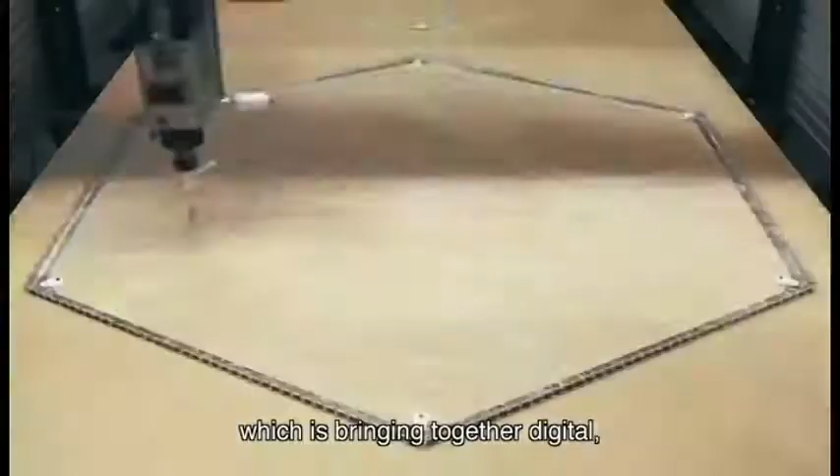Computers and communications technology. We're now in the early stages of the fourth industrial revolution, which is bringing together digital, physical, and biological systems.

One of the features of this fourth industrial revolution is that it doesn't change what we are doing, but it changes us.

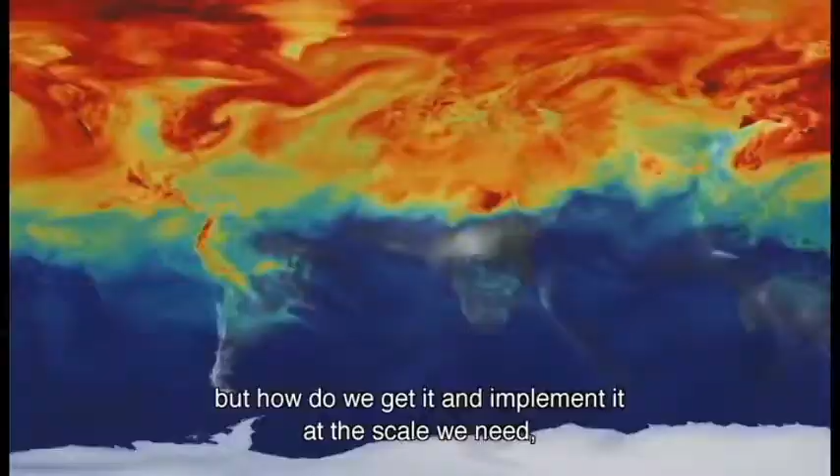We need a different economic model that will allow us to meet the basic needs of every human on the planet, and that will be focused not on growth per se, but on maximizing human well-being. We have energy technologies that can power our civilization, but how do we get it and implement it at the scale we need at a price that people around the world can afford?

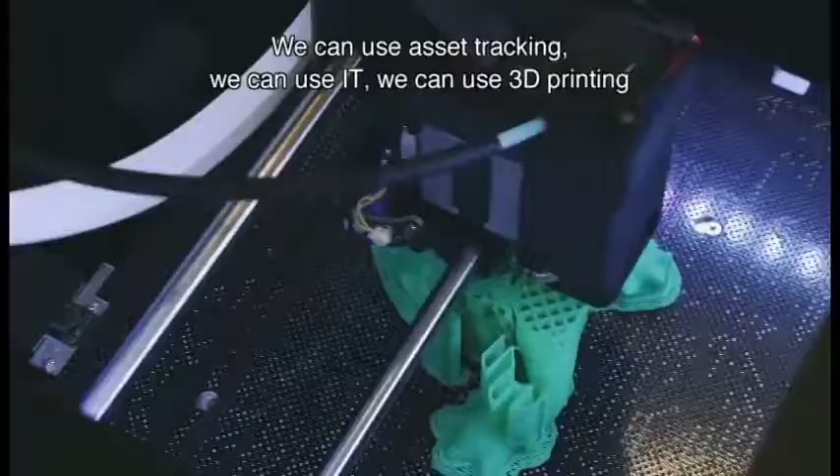If we're able to do something to transform cities, to make them more efficient, then the impact can be huge. We can use asset tracking, we can use IT, we can use 3D printing to decouple growth from the resource constraints we have. The question of adding quality to quantity, it's really about a diverse, safe, healthy, and just world. It's this ability of digital technology to change outcomes, to truly empower people that can create a more...

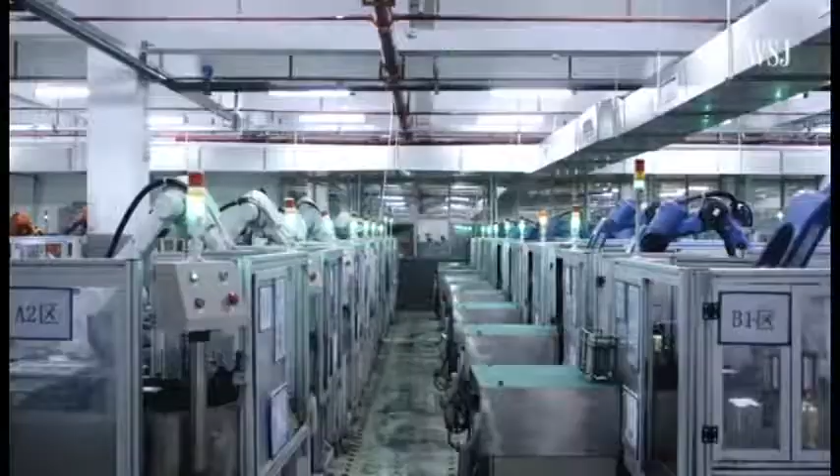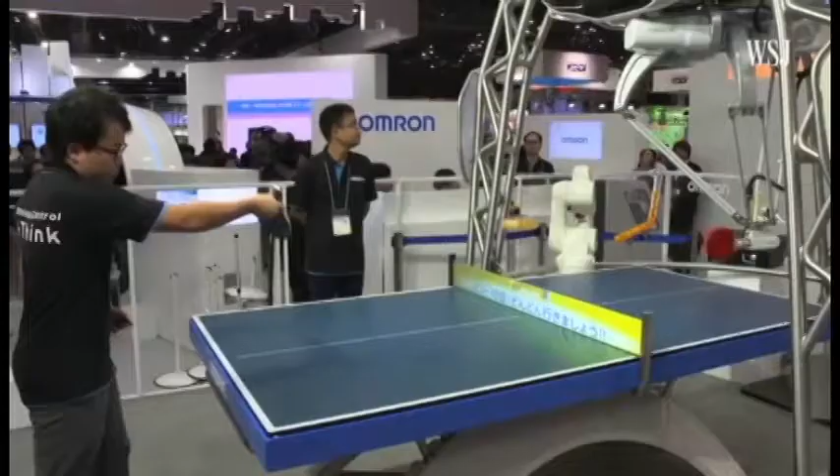Some economists say the world is entering a second machine age. Artificial intelligence and other advancements enabling robots to do tasks that until now only human eyes, minds, and hands could handle.

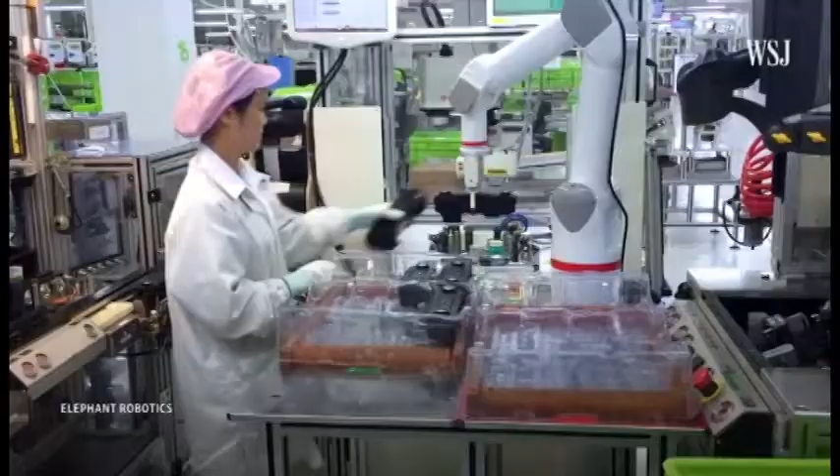The head of the robotics division at Yaskawa, Masahiro Ogawa, seems most excited to talk about robots that don't need to be walled off from humans, that work alongside employees. In the industry, they're called cobots.

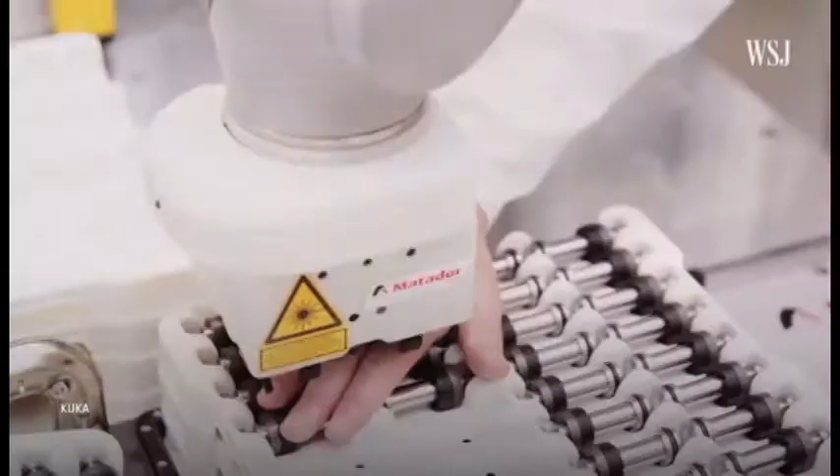The International Federation of Robotics predicts that in coming years, cobots will lead the robotics industry. That's partially driving startups like China-based Elephant Robotics to get in the game.

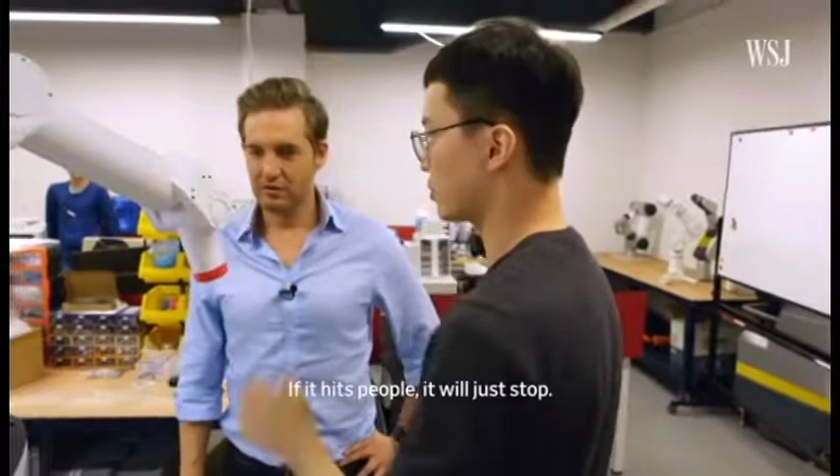If it hits people, it will just stop. Yeah, so it works with people. Yeah.

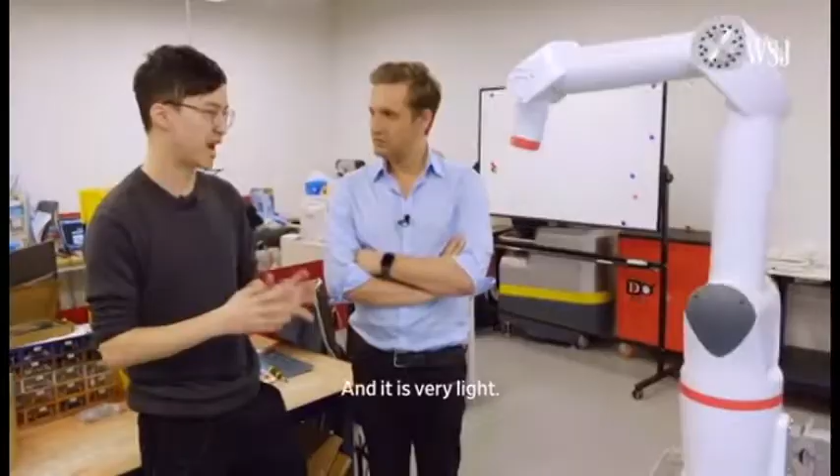We asked their founder, Ju-Yi Song, how his cobot is different from traditional robot arms. It moves not that quick, and it is very, very light, so it can work with people. This is the most important thing.

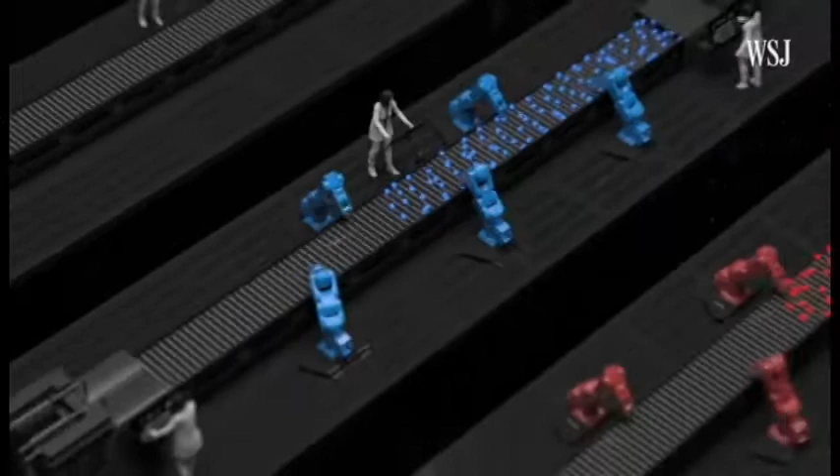In addition to being safer, the collaboration proves to be more productive. A study conducted by MIT researchers found that human-machine groups were more efficient than teams wholly comprised of one or the other. They also reduced human idle time by 85%.

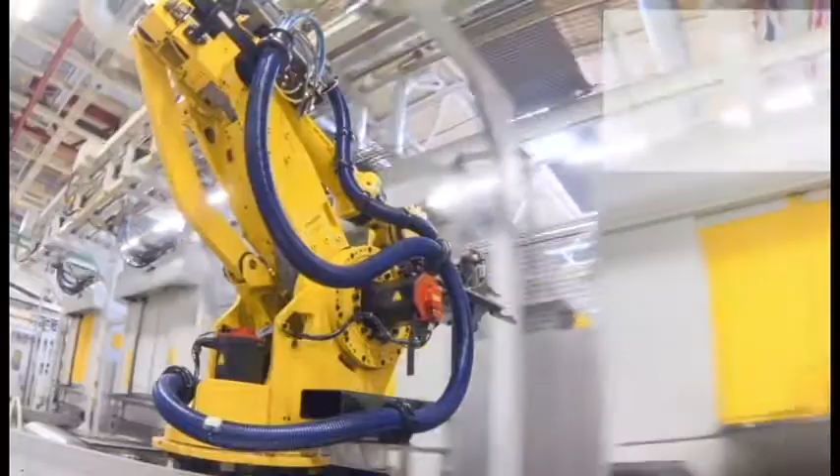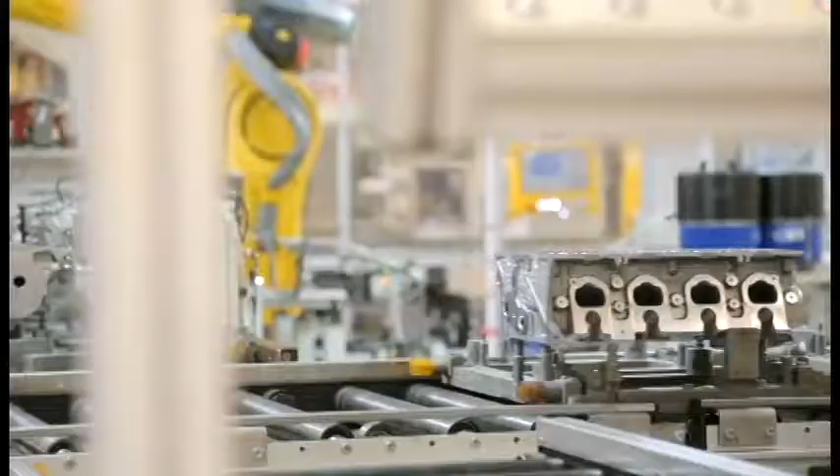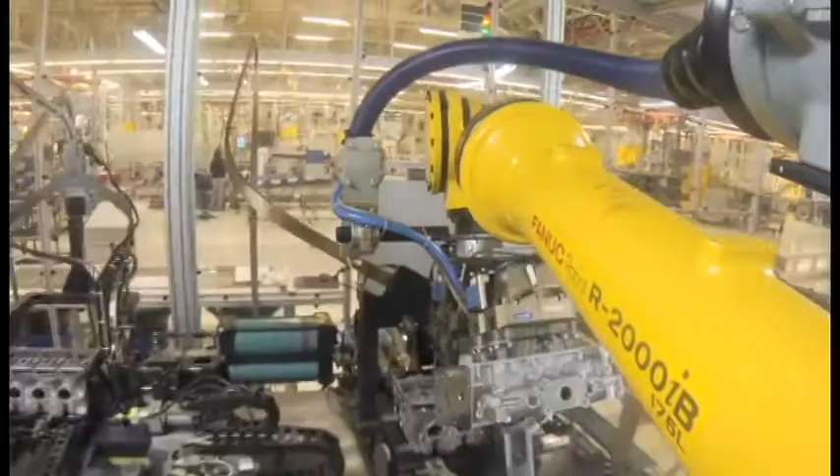FANUC robots and factory automation solutions have been facilitating industrial production for over 60 years. FANUC is present in 120 countries, including Hungary, assisting key sectors like the automotive industry, for example at the Audi Hungaria Motor Limited factory in Győr, where they are developing and manufacturing cars for the Audi AG and the Volkswagen Group.

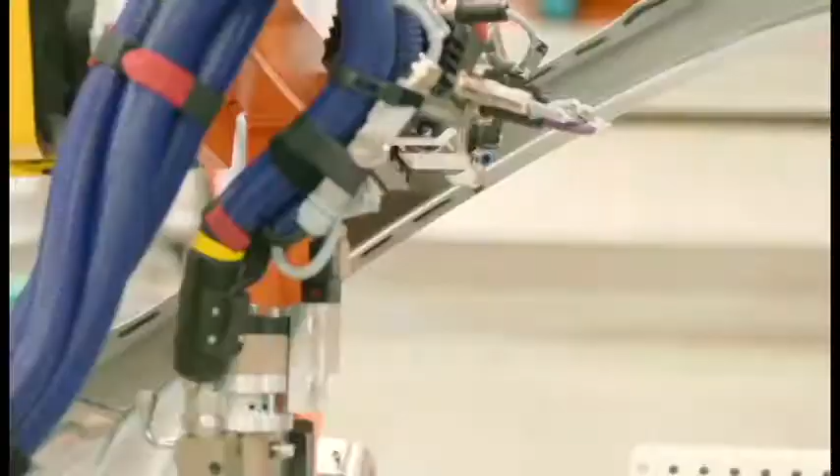Audi Hungaria is one of the companies with the largest turnover and export in Hungary, producing 2 million engines and 135,000 cars in 2014.

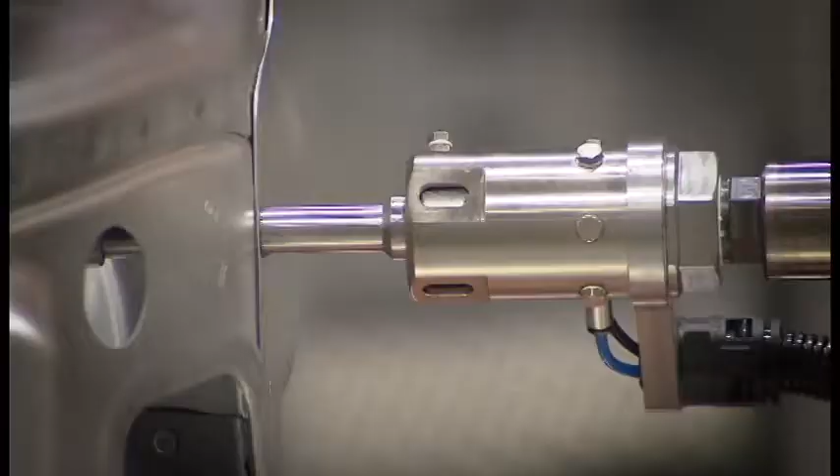In our experience, FANUC robots work reliably at our factory. We are constantly improving our production and install robots to reach our targets. In environments where we need to work with high pressure or temperature, the robots are up to the task and deliver quality standards, which would not be possible with human machining.

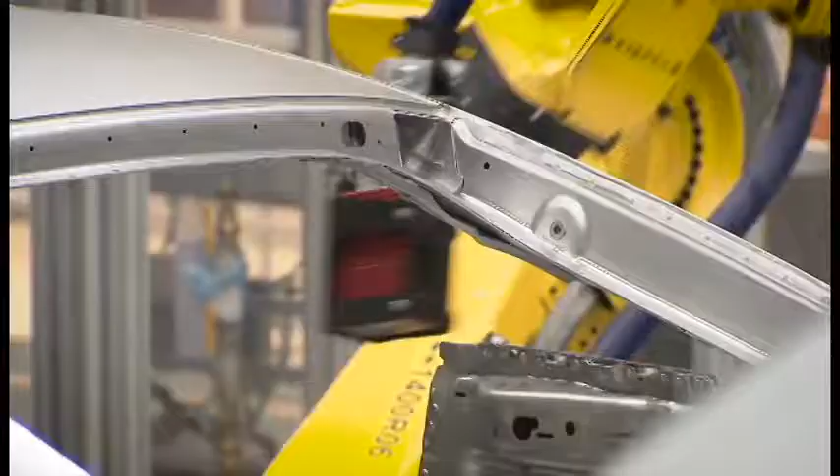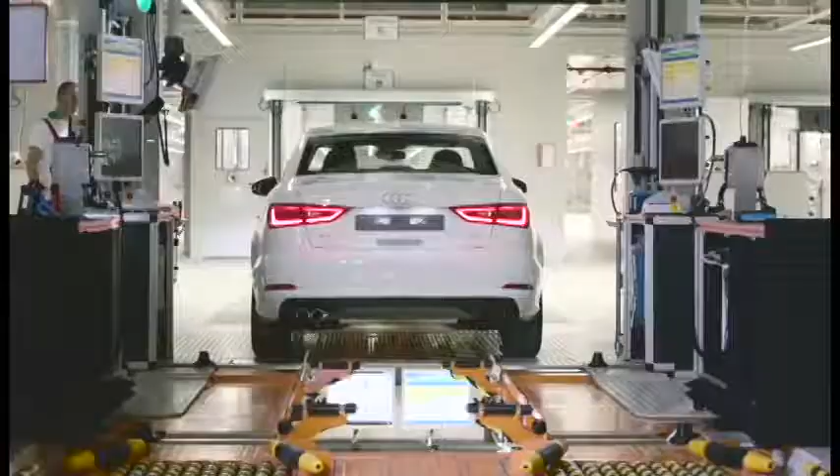Essentially, robots are used for applications too difficult for humans or where rapid machining is required. Our colleagues like working together with robots as they make human work easier by delivering these tasks. It's very important to program these robots correctly, because when problems arise, it's usually not the robot that causes them, but improper programming or the lack of maintenance.

Regarding this, I'd like to highlight that FANUC robots are easy to program, dependable, and we have a very good experience with them.

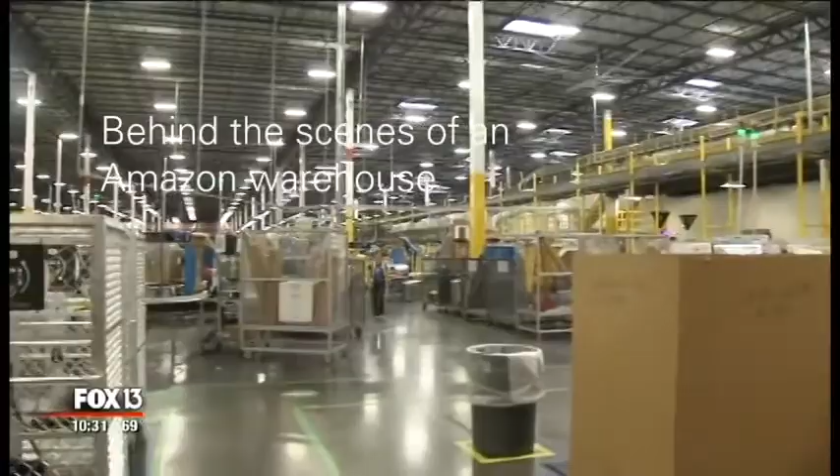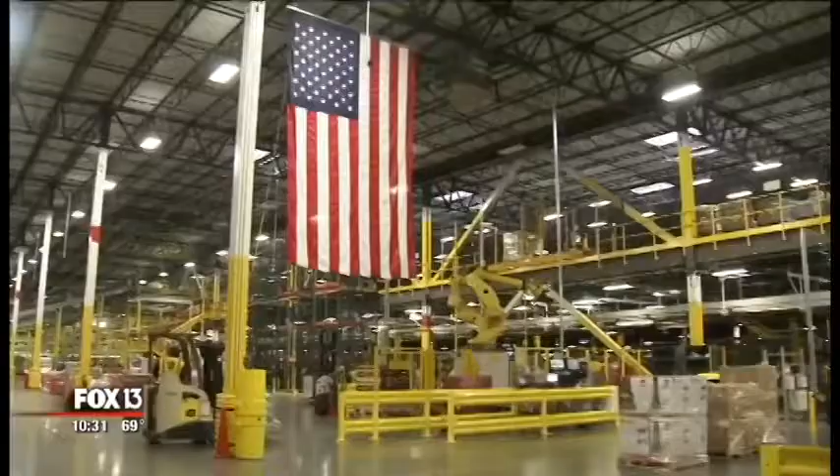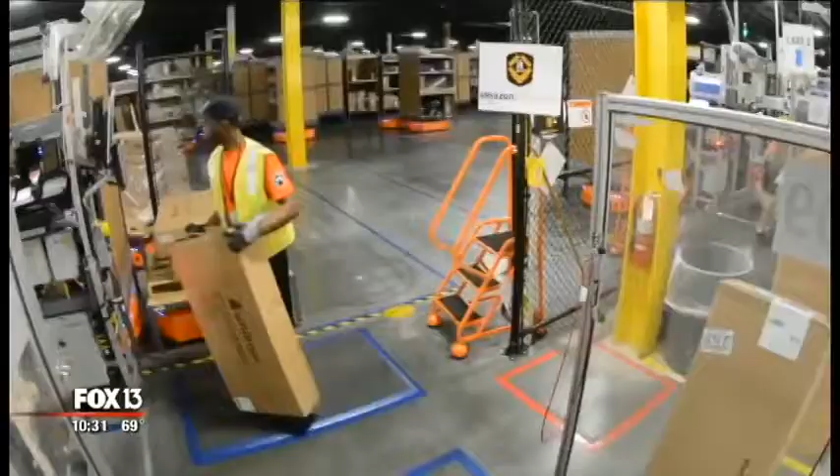One 6-ton pallet slinging robot — we affectionately call it Robo-Stow — and a squad of box-shuffling cyborgs. We like to think of it as a symphony between robots and our great associates.

We found a secret at our feet: the floor is covered in tiny QR codes. It's sort of like a chessboard. Eyes in the robots' bellies read the codes and broadcast their position — choreography that keeps your shipment on time and avoids collisions. They know exactly where to go.

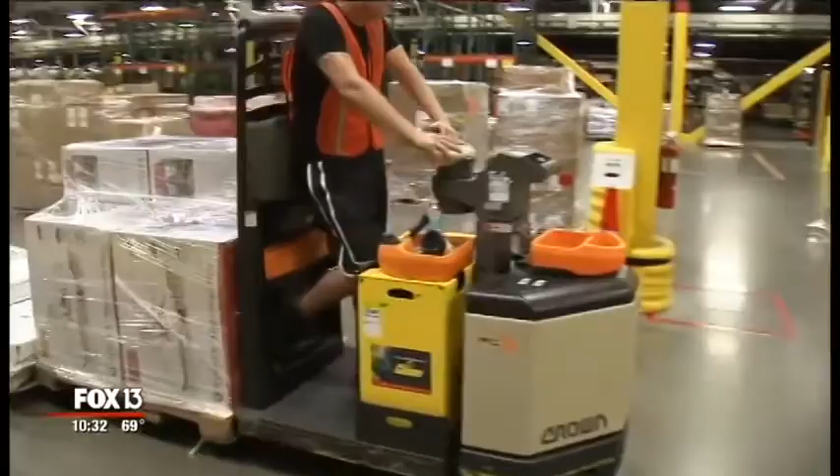Clicking that yellow button sets these robots in motion, sometimes within seconds. But your order is not handled by Android alone. The drive units, the Amazon robots, are actually bringing items from where...

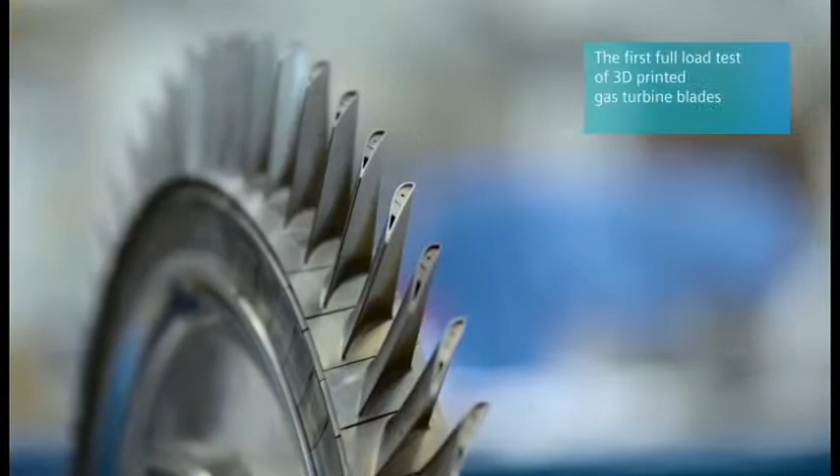The additive manufacturing process enables us to manufacture parts that we cannot manufacture today with normal, traditional manufacturing processes. That enables us to be more ingenious in terms of how we design our turbine blades, how we cool them and how we light them.

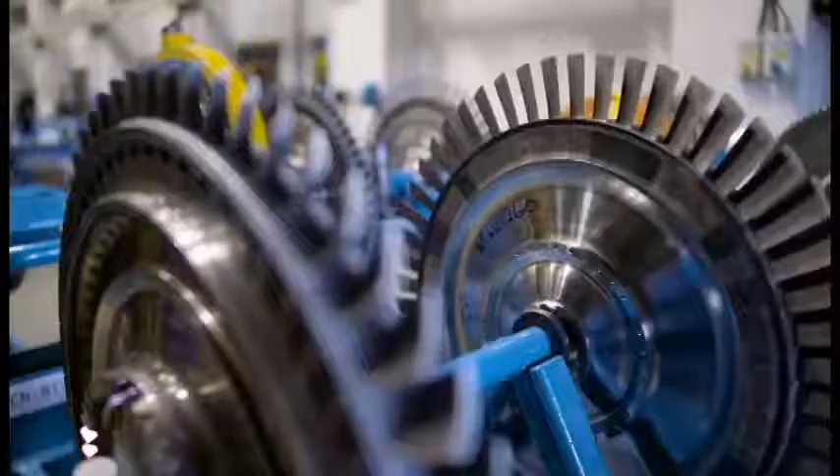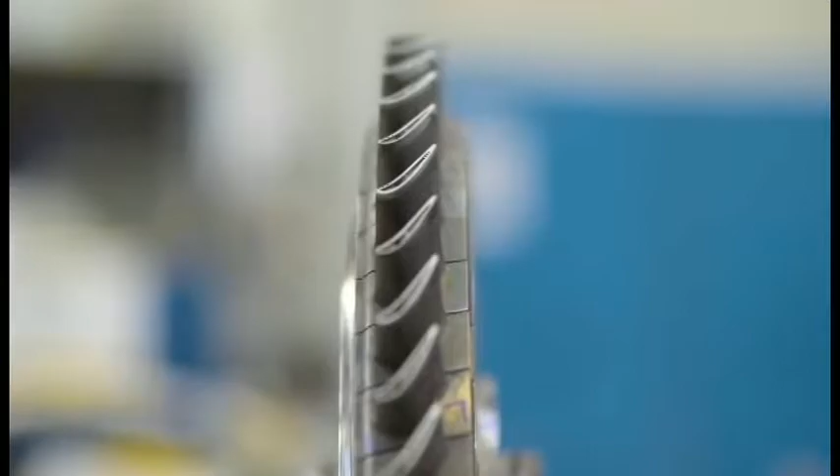Turbine blades has always been, I feel like, a vision. It's a real target. It's the most challenging area of the turbine. So if you can print a turbine blade, you can pretty much print anything. And we've proven over the last couple of weeks now that we have been able to print a turbine blade and test it in an industrial gas turbine engine.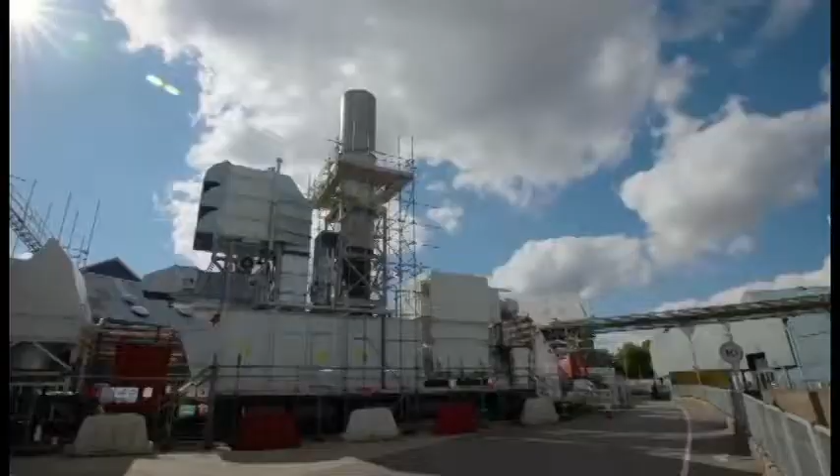In Lincoln, we're testing a 3D printed blade, and we believe this is special because it's the first time anywhere in the world this has been tested at full load conditions in a gas turbine. We test these blades very quickly. In 1 hour, we run the engine at full load. We put a probe in here to measure the material temperatures, which tell us how long these blades will last in a turbine.

Now, the turbine blade itself is this particular blade. This is the high-pressure turbine blade of a 13-megawatt SGT-400. Typically, we have to do all of the design, analysis, the aerodynamics, the work in terms of heat transfer on this blade 2 years before we can actually then understand in an engine how it's actually going to perform.

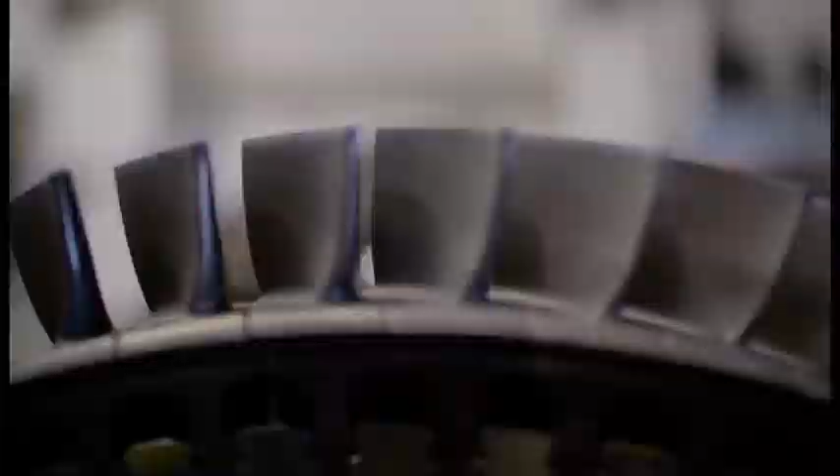What additive manufacture does, and this is the additive manufacture blade that we've actually tested in this engine, this gives us the ability to cut that lead time down from 2 years down to 2 months. It allows us to create new designs, to get more efficient engines, more efficient designs into our turbines, tested, and then onto ultimately our customers.

We will see quicker development times. You don't need this very expensive tooling in order to make your products. So that makes additive manufacturing perfect for design modifications. You'll get them much quicker.

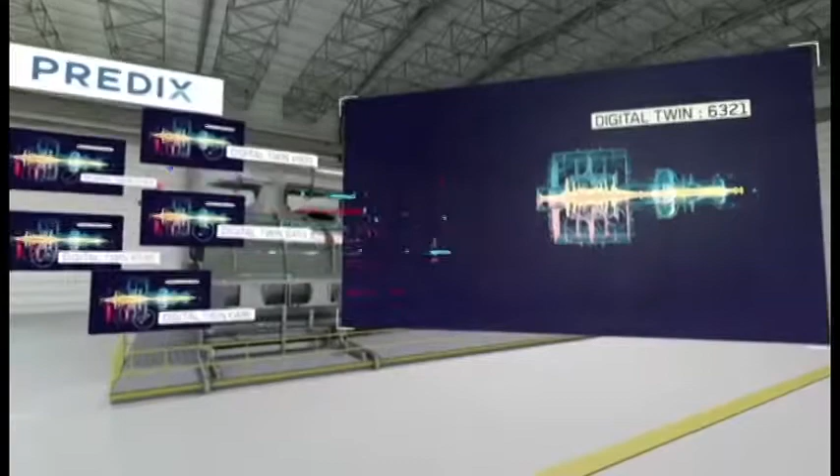Operator, a change in my mission is causing damage to my HP turbine rotor. Okay, Twin, help me understand the problem. What's your operating profile?

In past 6 months, my number of cold starts is 4, my number of warm starts is 8, my number of hot starts is 39, the number of start-stop cycles has increased by 27.5%.

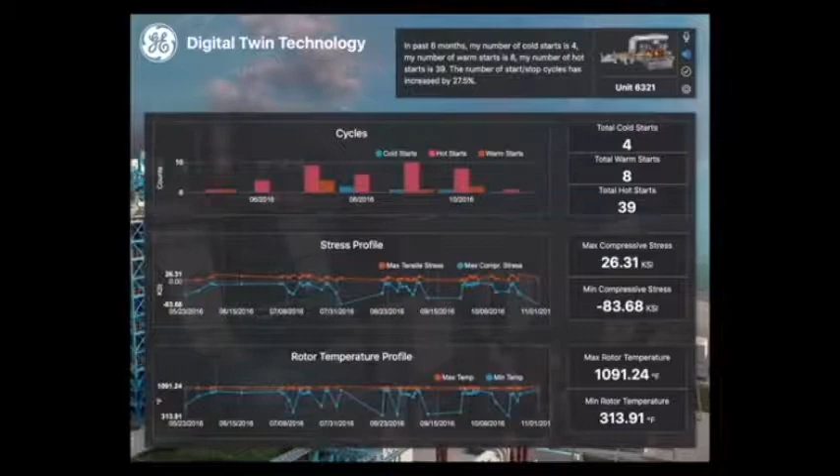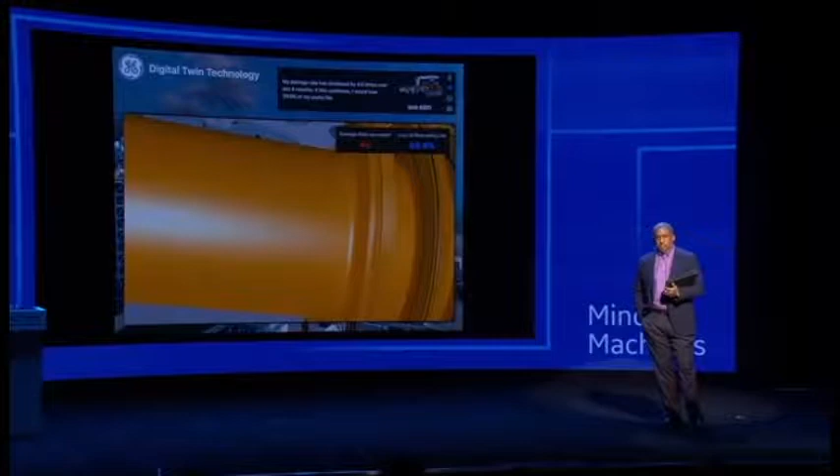Twin, tell me about your rotor damage. My damage rate has increased by 4.0 times over last 6 months. If this continues, I would lose 69.9% of my useful life.

Twin, give me options for mitigating that rotor damage. Based on weather forecasts, historical data, fuel cost, electricity pricing and my present condition, I have 2 options for you to optimize operations. Option 1 is to manually slow down my startup ramp rate so that you can reduce the wear on my rotor. Option 2 is to download the OpFlex app and apply stress controls to minimize wear and reduce fuel consumption too.

Twin, give me the factors you use to calculate option 2. I used my past 15 years of historical data, fleet learning from 125 other D11 steam turbines like me, and 58,965 simulation runs to get this recommendation. I'm 95% confident of my assumptions.

Twin, I need a financial perspective. Tell me about the numbers. The numbers look good. We can reduce stress by 25%, which brings the damage rate back to normal range. Startup fuel cost will go down by 40% and startup time will be cut by 50%. You will also avoid $12 million by preventing an unplanned outage.

Twin, okay. I select option 2. Let's do it. I'm initiating option 2, which is Flex Start. Thank you. This is happening now, today.

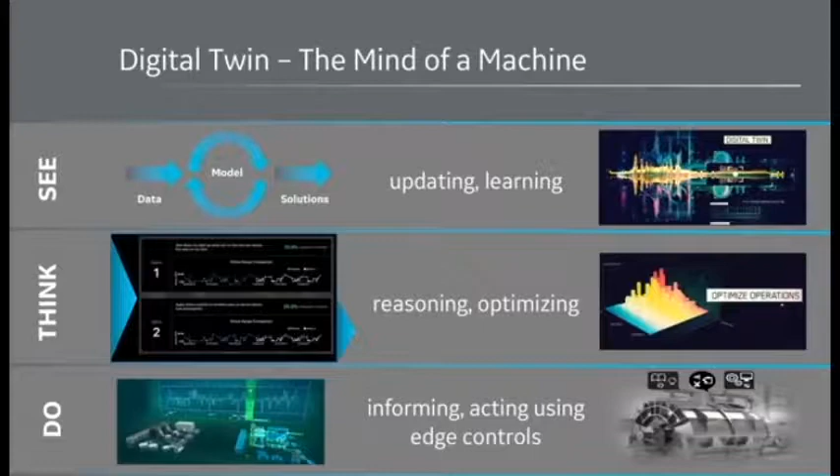This is a representation of a D11 steam turbine that's currently running in Southern California. We call these representations digital twins. What you saw was an example of the human mind working with the mind of our machines. What's a digital twin?

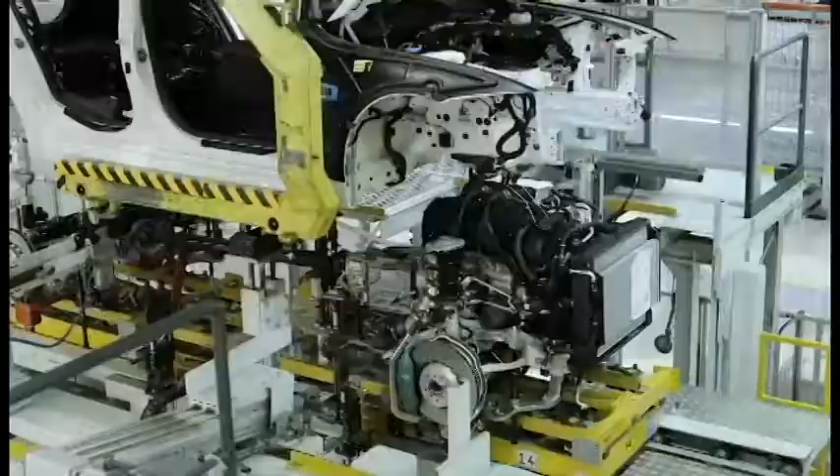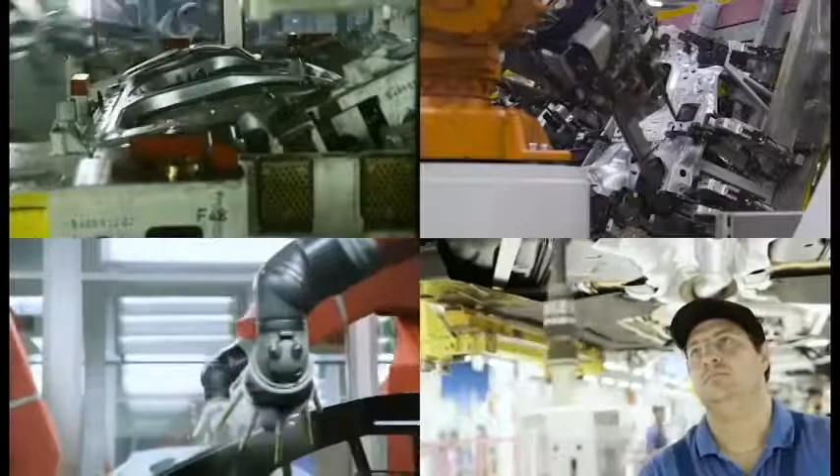Digitalization opens up fascinating new possibilities for the BMW production system. Large quantities of data are generated at many stages in car production. Today, we are already drawing major benefits from intelligent analysis of production data. Our customers benefit from even higher quality. Production uses resources more efficiently, and we are able to manage system maintenance more precisely. Let's take a closer look at the innovative solutions that emerge when our specialists immerse themselves in the virtual world of data.

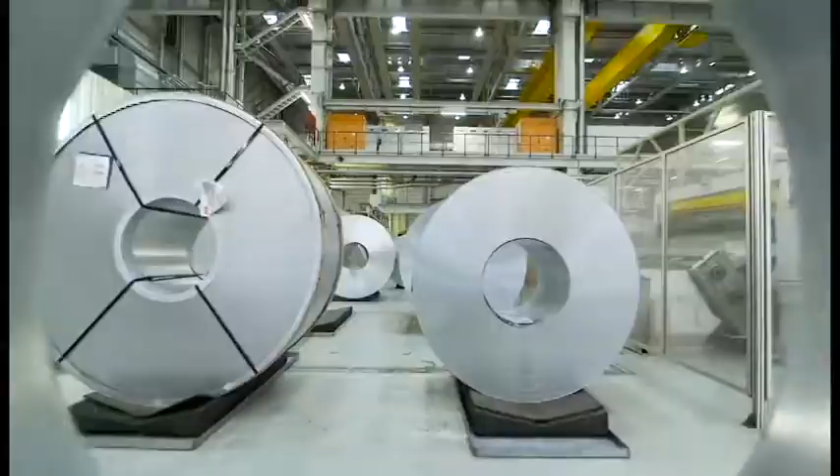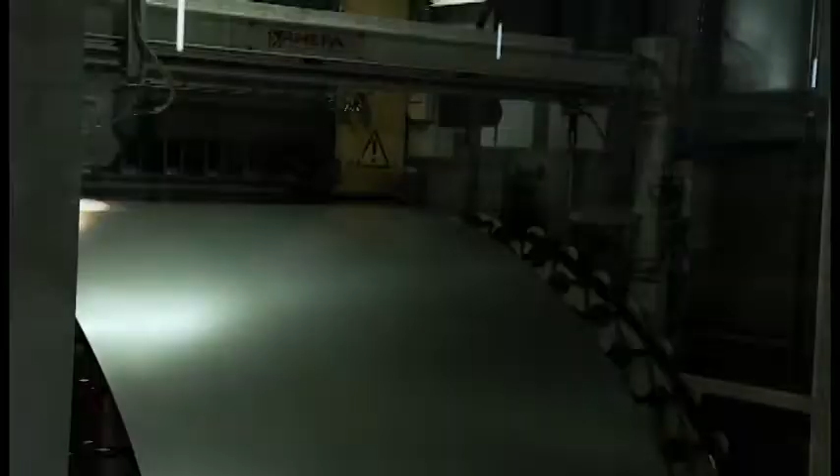Starting with our new BMW X1, several kilometers worth of steel are used to form parts for the body. But on a 3-kilometer roll of steel, there are bound to be deviations. The material is not equally strong or thick in all places. Some areas have been oiled more, some less. So how can the press that forms the flat sheet into body parts be adjusted to the unique individual characteristics of a cut panel?

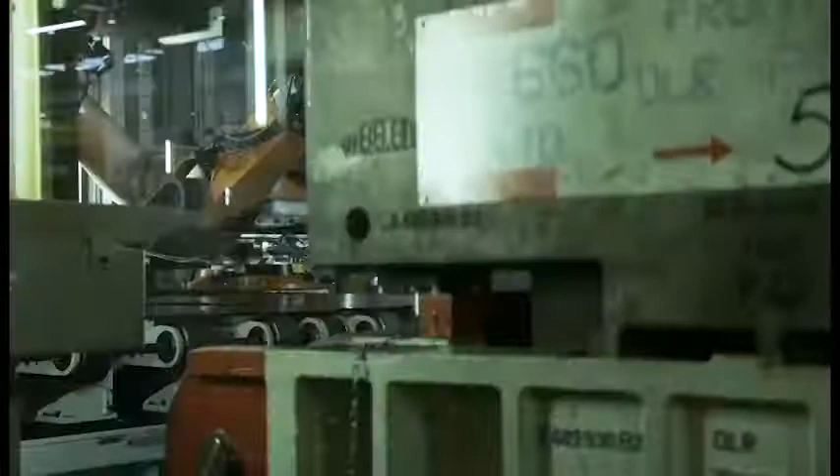Here's the solution. Each tailored piece, also known as a blank, is gauged and given a laser marking with data that can be transmitted into the press.

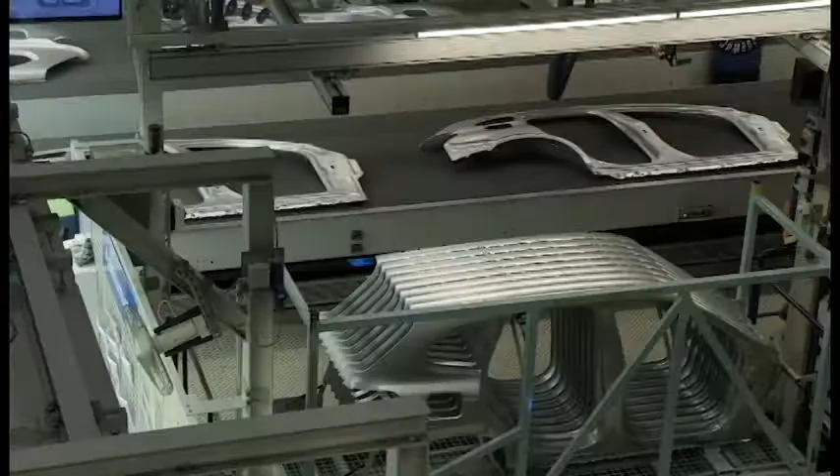The individual parts formed in the press shop proceed to the body shop. Just like in a jigsaw puzzle, these parts are fitted together step by step to create the body.

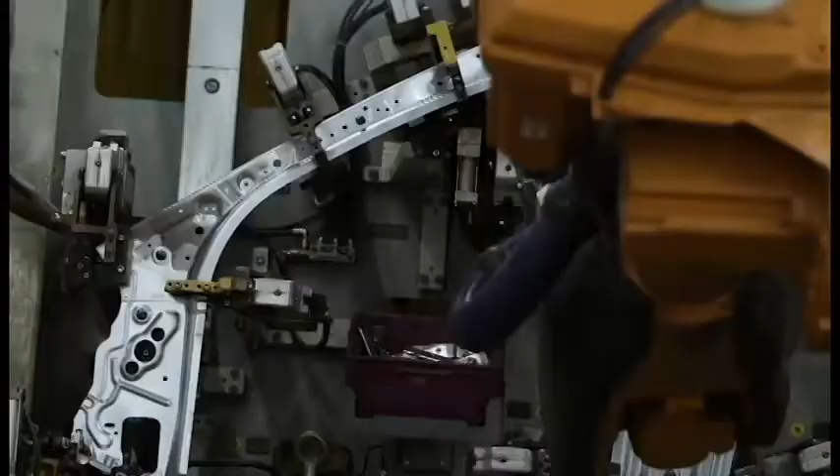Predictive maintenance ensures reliable operation of a large number of systems. It can also predict breakdowns before they occur. Sensors monitor electric drives for lifts and turntables, for example.

Up to 2,000 robots perform welding and bonding operations with maximum precision. Sensors monitor the status of the robot's gears and brakes so they are always fully operational. Cylinders and valves in welding guns and welding heads are also constantly monitored and analyzed.

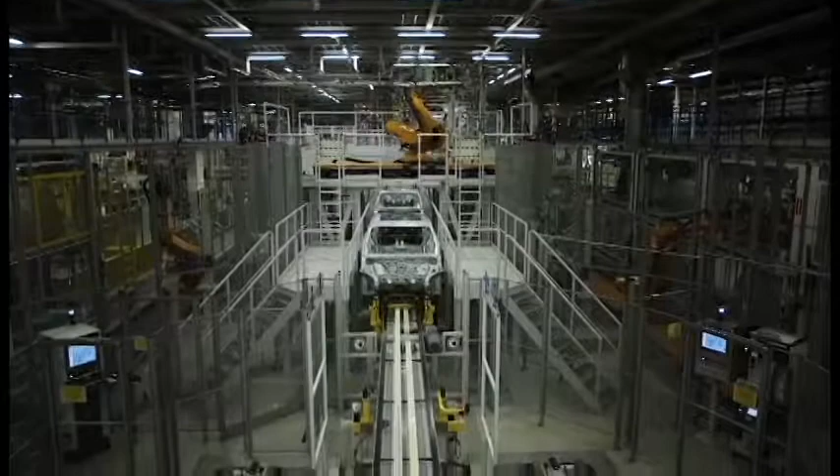As a result, maintenance technicians are able to intervene at exactly the right times. This ensures optimal utilization of production facilities.

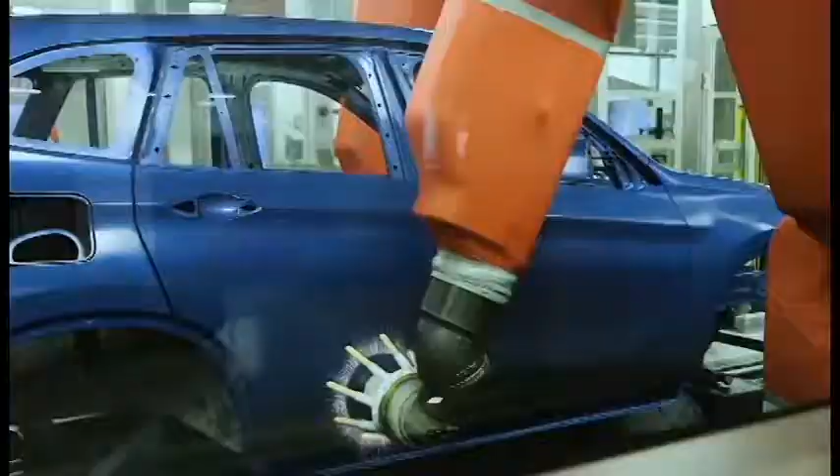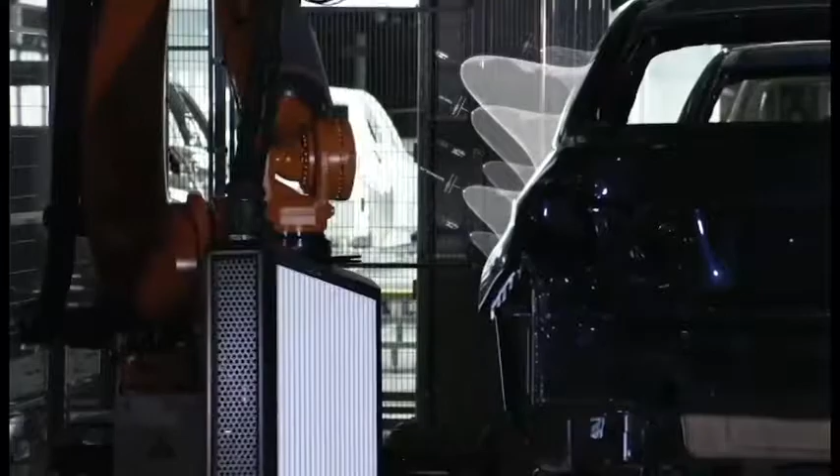Sensors also monitor all production processes in the paint shop on an ongoing basis. Through online process control, large volumes of data are structured so that staff can fine-tune processes. Intelligent testing systems ensure the visual perfection of the painted bodies and guarantee the highest level of quality for our customers.

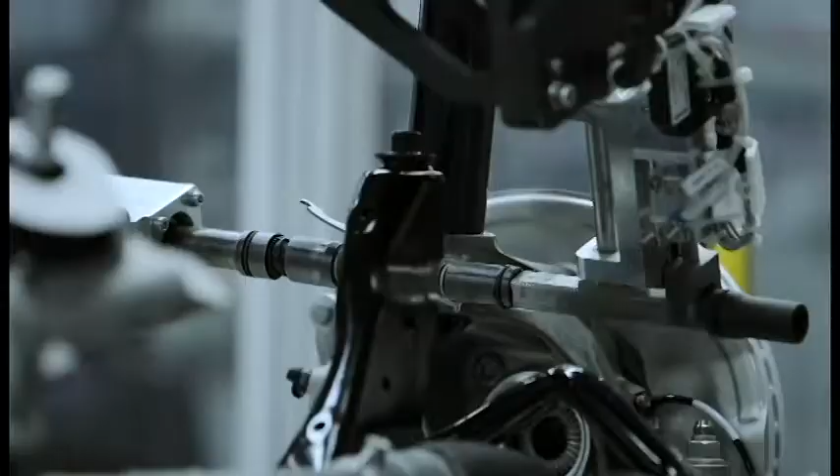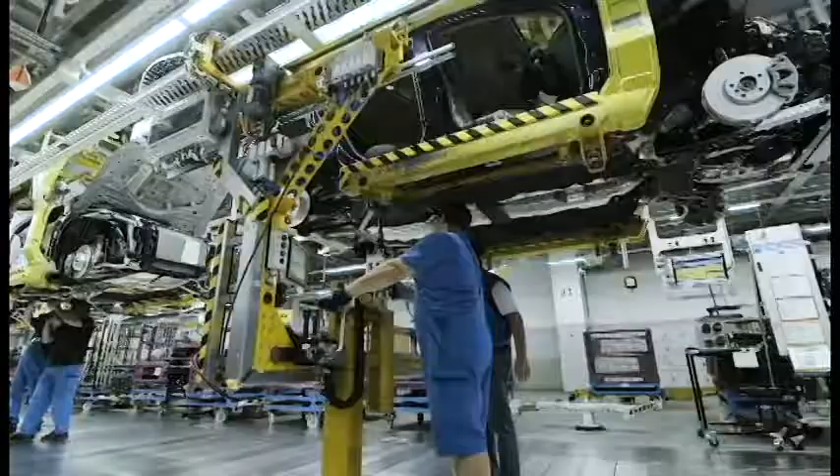Hundreds of bolted connections are made before the powertrain and interior equipment are fully installed in vehicle assembly. Data from the bolting processes, such as tightening torque, is used by quality management staff for systematic monitoring of these processes. Important findings from analysis of this data are incorporated into staff training to help avoid errors. This creates a closed loop of continuous improvement.

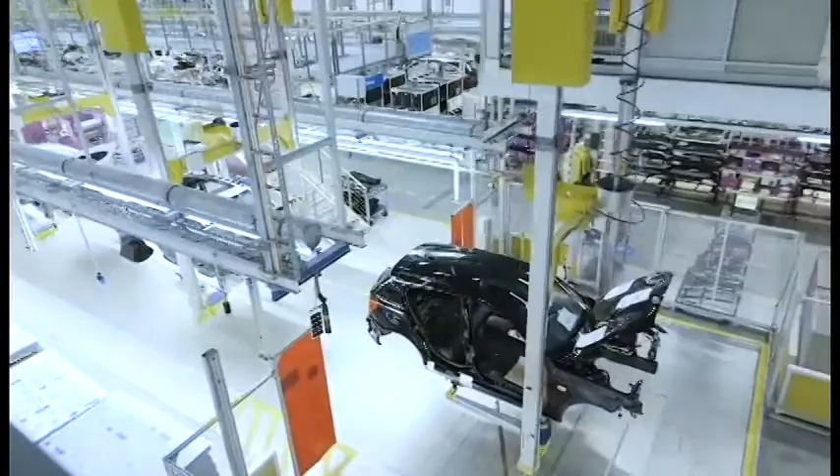A single assembly line builds many different models, so it naturally causes problems if the conveyor comes to a standstill. Therefore, a large number of sensors constantly monitor the conveyor system.

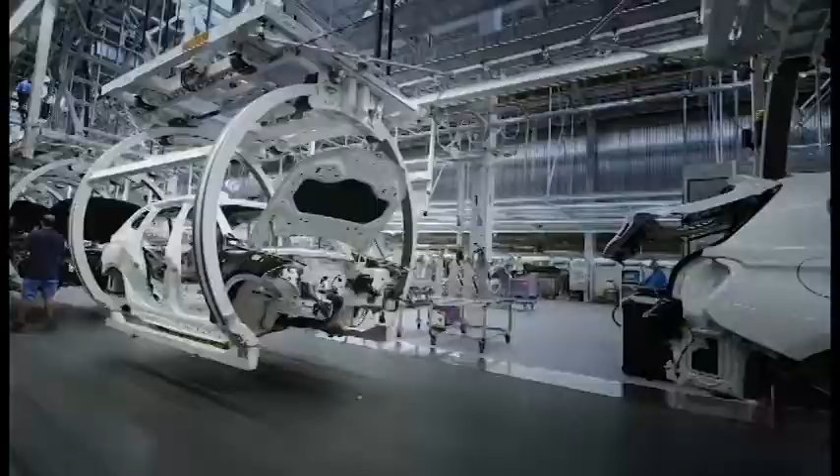Data from these sensor kits is streamed live to the BMW Internet of Things platform, where it is visualized and analyzed in real time. If the platform reports a trend indicating deviation from target, staff can decide whether to remove the hanger for maintenance. In this way, it's possible to ensure long-term, reliable operation over a number of years.

Our focus is on intelligent analysis of data from production so that we can make the right improvements to our processes and achieve the highest level of quality and sheer driving pleasure.

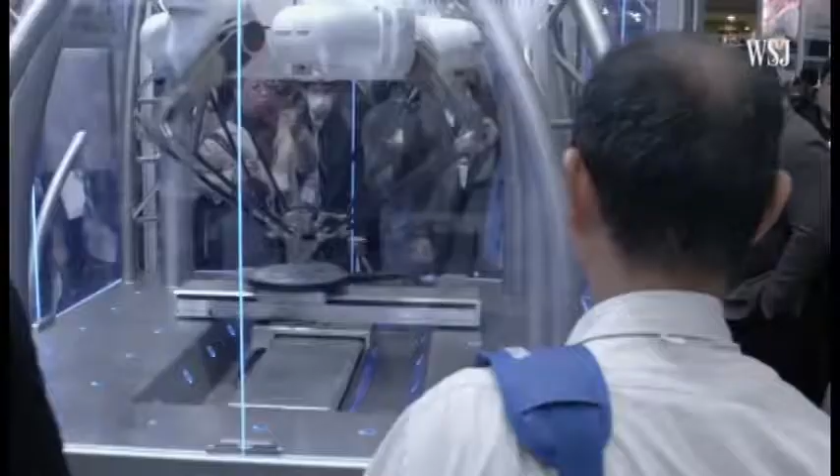We used to have to really painstakingly teach the machines step by step, program them what to do, and now machine learning is enabling the machines to figure out on their own how to solve problems. You put together the algorithms, the data, and the computer chips, and you get sometimes a millionfold improvement in the performance of these systems. A millionfold improvement?

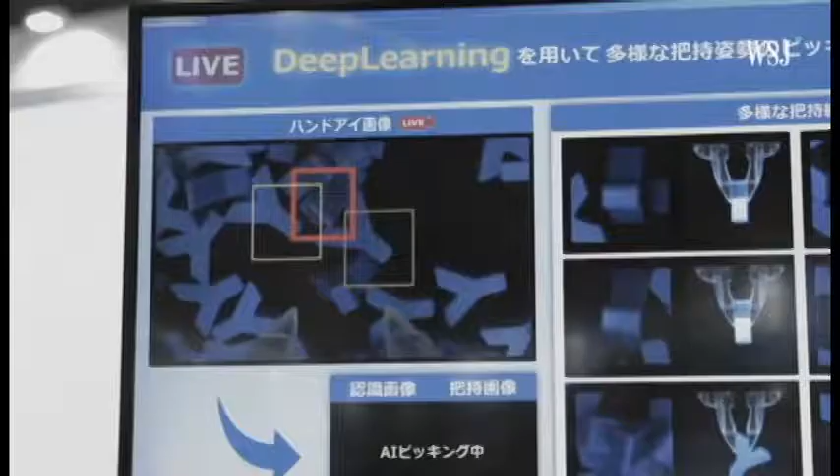Yeah. And what does that allow you to do? So one really important thing to do on the factory floor is just be able to recognize objects, and that's something that only humans could do well until recently.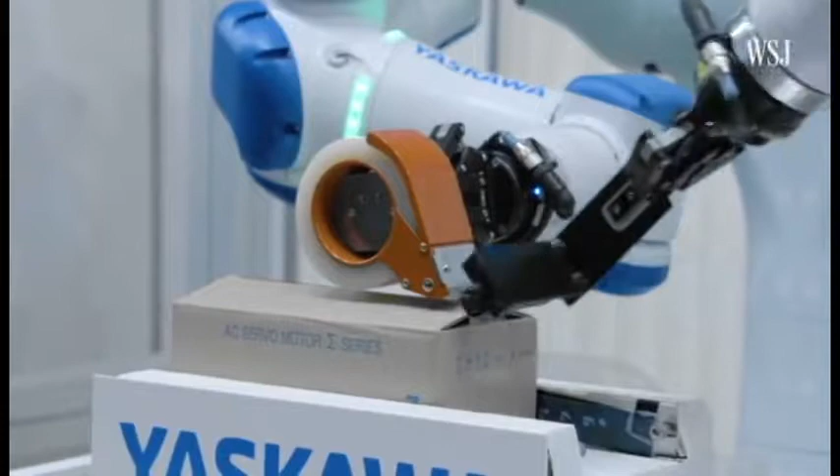At IREX, we witnessed a robot handling a task that I, as a human, don't do so well - futzing with one of those pesky tape dispensers. It's among the latest offerings.

The technology disruption of digitalization is forever changing the way we make things, and as a consequence, the other big thought: when we make things, we tend to have the capability to innovate things.

In other words, if I coexist between what I make and what I research, I will come up with the next best idea. And actually, companies like Dow, and every company that's our age, is only here today because of that - because we've figured out how to prototype the next thing based on the current thing.

And in fact, if I don't innovate faster, then I will be commoditized and be put out of business, because the life cycle of businesses has condensed.

It used to be that people like us in the chemical industry would think of, I build a plant, I build a factory, it's got a 20, 30-year life cycle, 15-year payback. Forget it. Cannibalization of yourself through innovation, through fast cycle innovation, has arrived.

And with modern digital technology, I can do that faster and surer than ever before. Just using robotics in high-throughput experimentation, I've gone from 25,000 experiments a year to 2 million experiments a year.

I can shorten the cycle when I deal with a customer on what new footwear design they need for their materials in footwear, to give them what they want in terms of attribute. I can do that from first conversation to launch in less than a year, whereas that would normally take 3 to 5 years. That short-cycle innovation is what advanced manufacturing is.